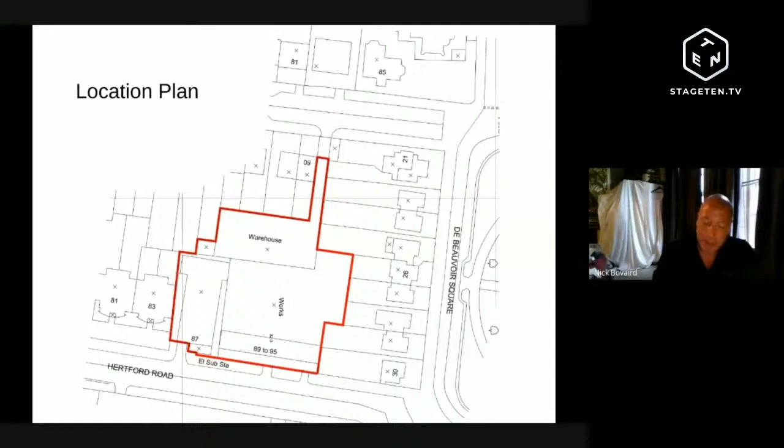The site contains a group of vacant factory and warehouse buildings to the south of de Beauvoir Square and in the de Beauvoir Conservation Area. This is the second time this application for this site has been before committee, having been approved previously in 2010. The approved scheme, though similar in its layout and massing, was inferior in many respects to the current proposal and was decided under UDP policies. The Section 106 for that scheme was never agreed. Subsequently, the scheme was revived with new drawings and further consultation, and this is the scheme before you now.

This is the view towards the site looking north, with de Beauvoir Square to the top of the screen and the site placed directly below. Kingsland Road runs north-south to the right of this picture.

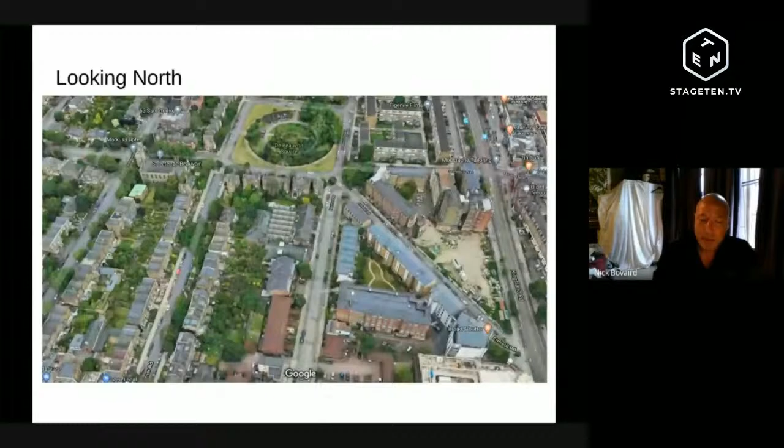The main application, 2009-2842, is for the demolition of the rear buildings, including the Sawtooth Central building. It would retain the L-shaped buildings facing the camera here and fronting Hertford Road. The site is locally listed, but these are the two main heritage elements. A mixed-use development of employment floor space and 6 residential dwellings would be constructed around a central courtyard.

2020-0684 is an associated listed building consent. The site does not contain a listed building, but an existing wall to be demolished appears to have been built above the curtilage-listed garden wall of the listed buildings of de Beauvoir Square to the north.

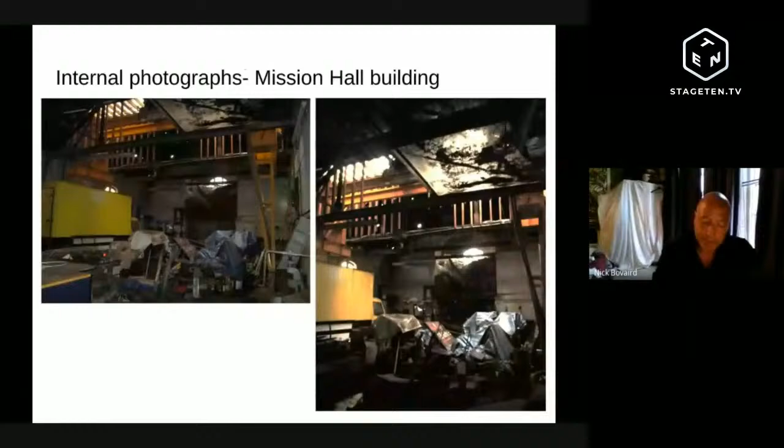These photographs show the inside of the Mission Hall building, with its internal crane and poor levels of light. There's currently only one internal level. The Boris Building is arranged over the 2 levels shown here. It still contains the machinery last used for making bags.

The top picture here shows the rows of shelving within the central sawtooth-roofed building of the site, which is to be demolished. The bottom picture is for the northernmost building, also to be demolished. This building is in particularly poor condition. Neither of these 2 elements are considered to have significant heritage value.

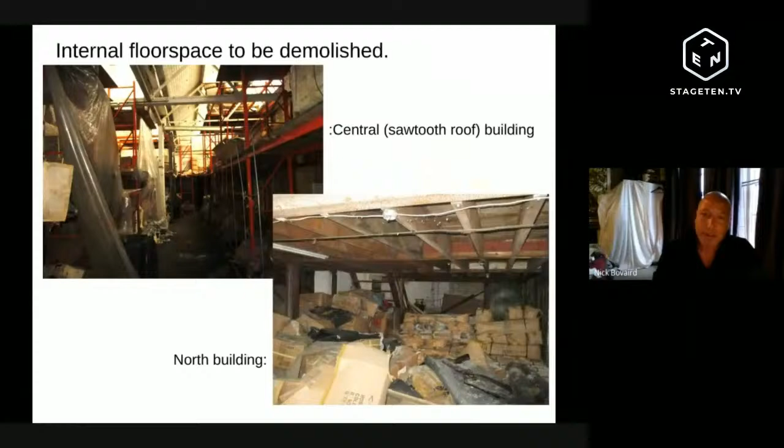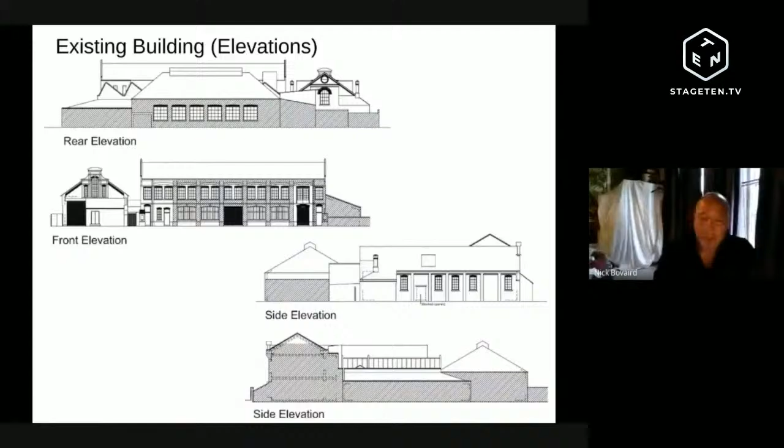The massing of the existing buildings can be seen on these elevations. The existing plans show that the site is generally laid out over ground floor level only, with high ceilings to reflect the use. The Boris Building is the only one with 2 stories at present.

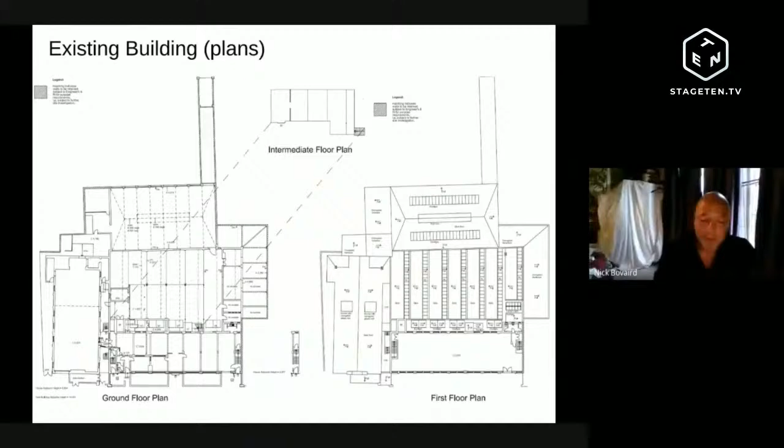The proposed ground floor plan shows the retained buildings to the front, with a passage laid out through the Boris Building to the courtyard in the centre of the development. The separate commercial and residential cycle stores are located within the courtyard, along with 2 areas of soft landscaping.

To the rear of the site, top of the screen here, is a terrace of 6 houses, arranged over 3 floors and with private gardens.

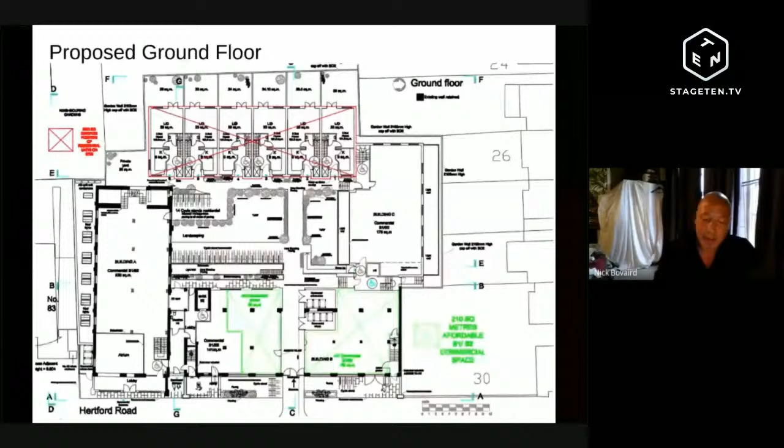As is laid out in the committee report, the proposed standard of accommodation for both commercial and residential occupiers is considered good. The proposed affordable workspace would be in 2 spaces at ground floor level of the Boris Building, seen hatched in green here. This represents 10% of the proposed office floor space and is located well within the site.

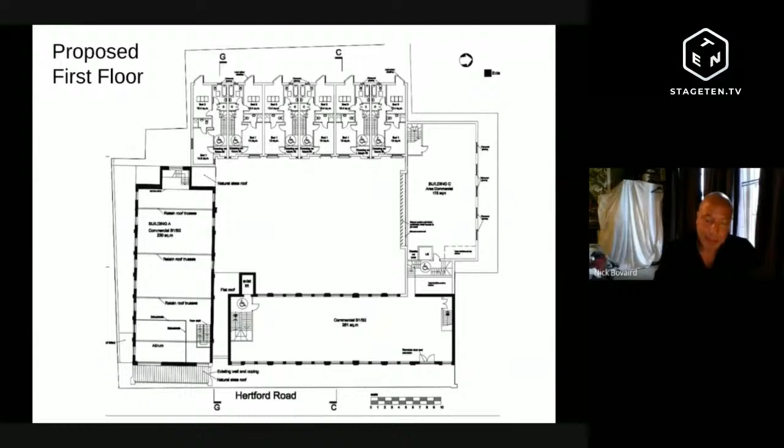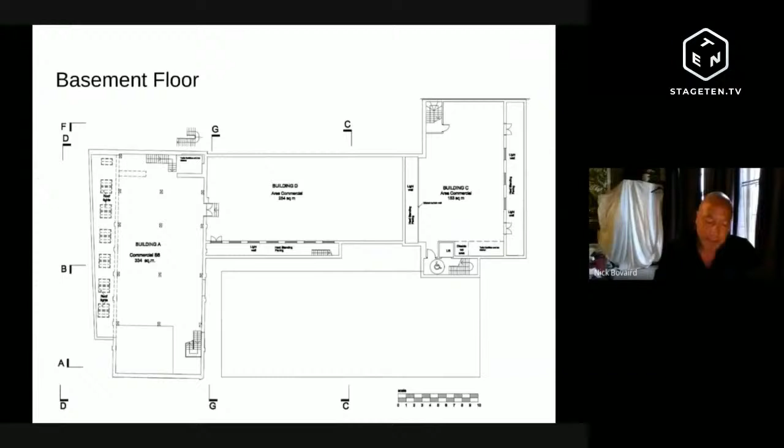In design and conservation terms, the proposal is considered acceptable for this conservation area location. The Boris Building and the Mission Chapel are important locally listed buildings located in a prominent location within the de Beauvoir conservation area. The reuse, repair and reinstatement of lost architectural features on these locally listed buildings for a considerable public benefit will ensure a sustainable long-term future and will result in an enhancement of the overall conservation area.

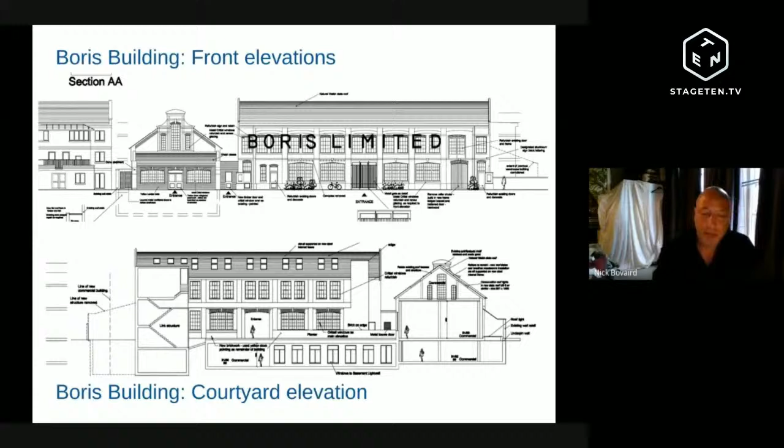The two buildings of significant heritage value are retained, and the courtyard element introduces a good amenity area to the heart of the site.

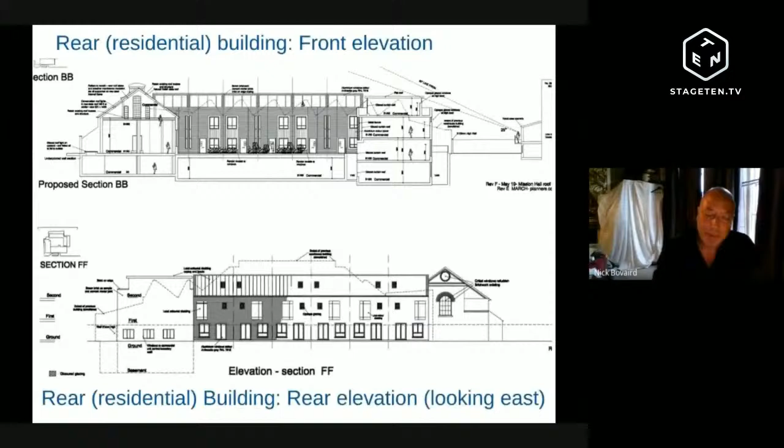The detailed design of the residential building seen here, and here to the left, is not yet fully realised. This is also felt to be the case for the dark brick commercial building to the right. We've recommended conditions to obtain full details of the architectural detailing and materials at the next stage. As such, the design of these buildings can be considered acceptable.

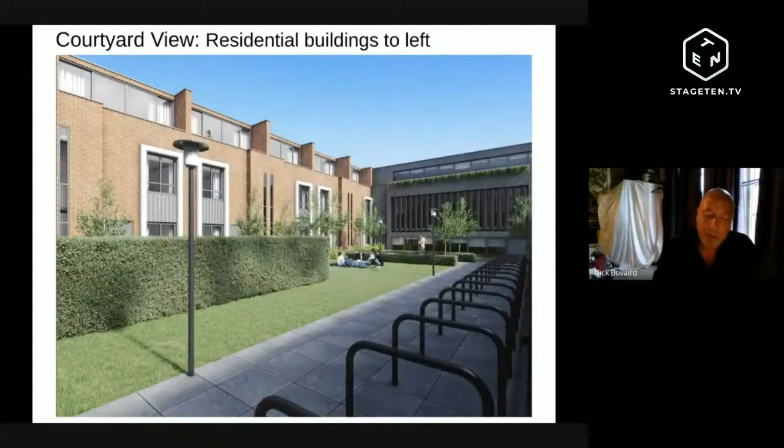The new buildings to the rear, and in particular those bordering de Beauvoir Square, will result in a degree of heritage harm as a result of the changes in massing. However, overall, the public benefits of the scheme, including the reuse and repair of these important non-designated heritage assets, is considered to outweigh this harm.

The massing of the new buildings differs from the buildings currently existing on site, but as laid out in the committee report, setbacks have been used effectively, and it's considered that there would be no significant additional impact on neighbouring occupiers in terms of daylight, sunlight, outlook, or sense of enclosure.

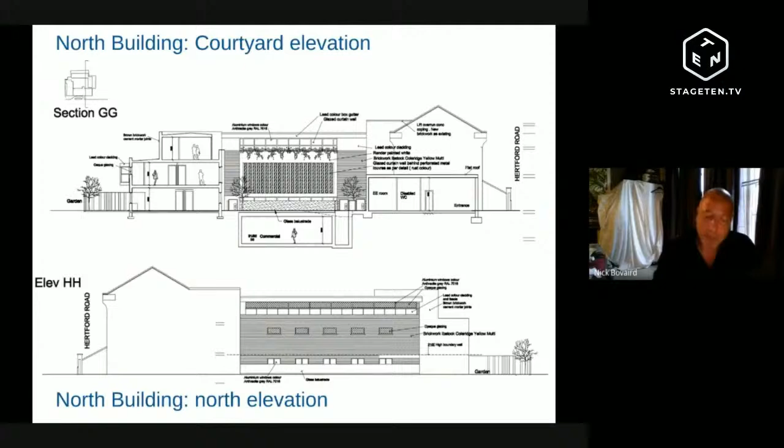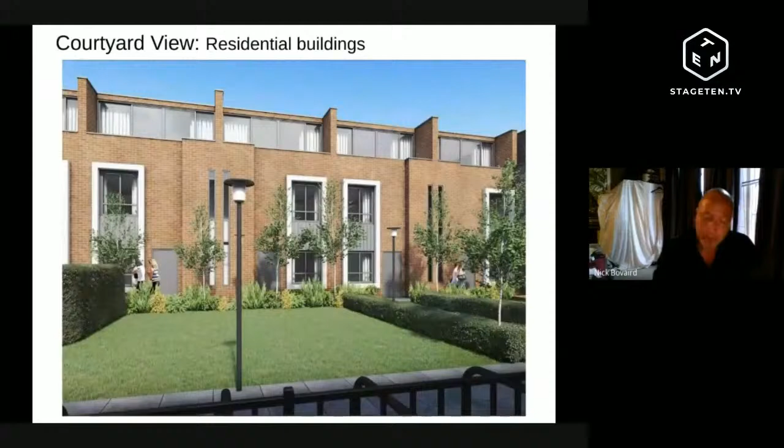Residential objections have referred to the restarting of an industrial use and the noise that commercial operations may bring. While an industrial use would not require planning permission in the existing buildings, the current permission provides an opportunity to soundproof and otherwise control the noise experienced by neighbours. The panel will have noted the detailed conditions in this regard, ensuring that noise is not audible at neighbouring residences.

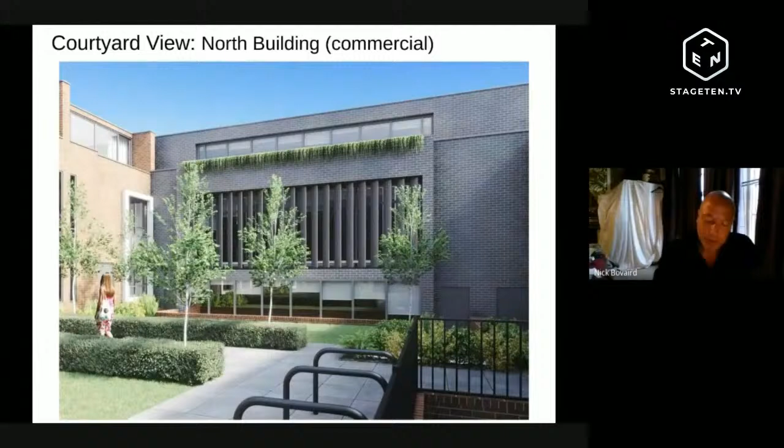In transport terms, the scheme is also considered acceptable, as laid out in the committee report. Along with the separate residential and commercial cycle parking within the courtyard, the proposal would provide a blue badge space and 2 electric vehicle charging points in front of the building.

So to conclude, the proposed application is considered to be policy compliant. It brings the 2 significant buildings on a locally listed site back into repair and productive use, while providing good quality commercial floor space and 6 new houses. In these and in other respects, the scheme is considered acceptable. It's recommended for approval subject to conditions and a legal agreement.

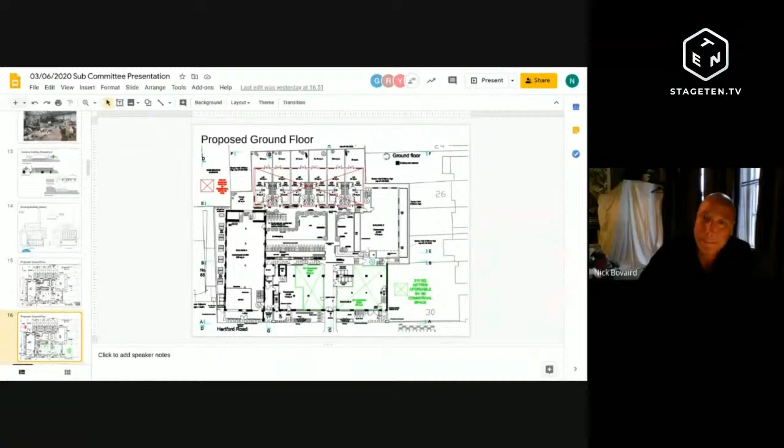Okay, right, and then from there to the footway, the roadway, where the refuse trucks can pick it up. Exactly, yeah. And they'll be wheeled out, I take it. Well, yeah, those will be wheelie bins, I think. Okay, thanks.

Okay, I think we know what we've got now. We're going to move to a vote, doing something our Parliament seems unable to do. I'll call for a vote, we'll all put our hands up, then I'll go round and you'll say for or against, like last time. Does everybody understand? We'll hold our hands up until we've told the legal officer and Gareth which way we're voting.

We've got one condition, that Peters brings back the elevation, perhaps the brick choice, and that the electric vehicle charging details go into recommendation C. So we'll have a little extra time to think about that, though not much, I suspect.

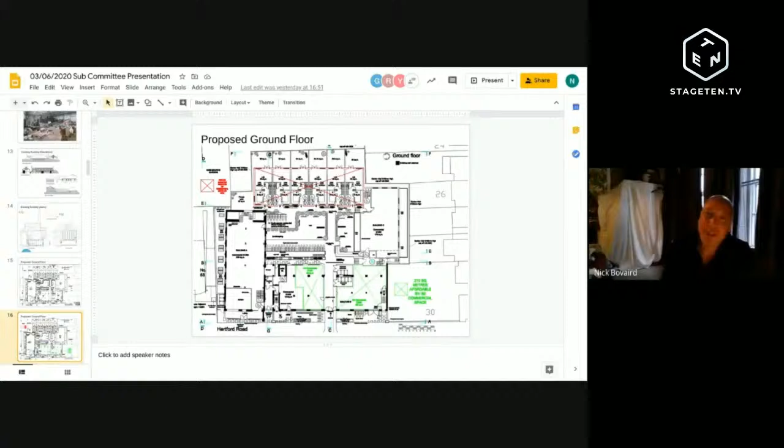So the recommendation is to... Okay, you've got a hand up before that. Councillor Potter, did you want to say something? She's muted, you need to press the button. Yeah, I know, apologies, it takes a while to come up on screen. If it is coming back, can we have more details on the retrofitting measures and how the decision is made in terms of the balance with the listed building, etc.? I'd just like more details on that, please, if it's coming back.

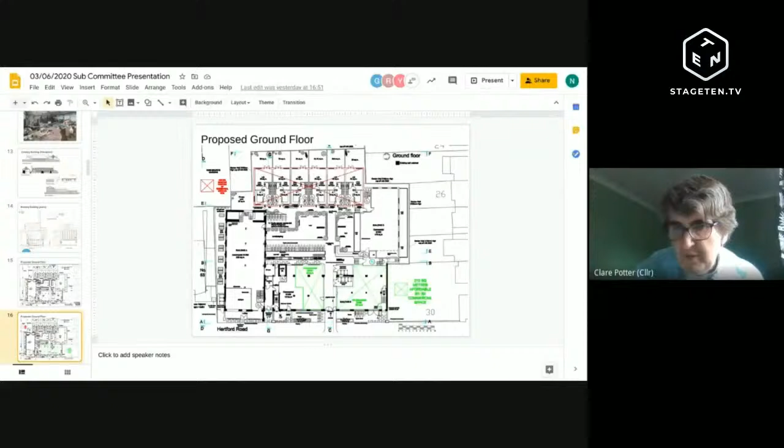Nick, is that a planning issue? I think that's something we agreed would be building control, but I don't think there's any decision for this to come back, is there? The decision that needs to be made is whether the condition comes back later. Is there a condition associated with the materials? Yes, there is. Insulation of the walls? No, there isn't, so that's a building control condition. And we're happy with the sustainability as set out in the sustainability document and reviewed by our sustainability officer.

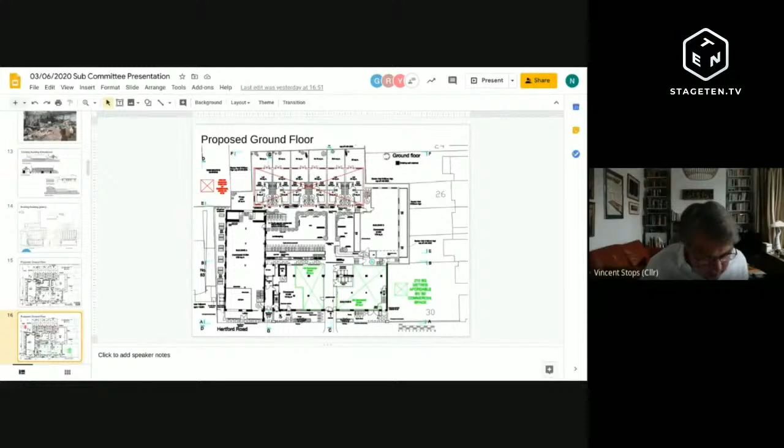Okay, right, so the recommendation is to grant planning permission subject to a 106. Sorry, let me take the presentation down, I forgot to do that. Well, according to this, it is done.

And is there a listed building consent as well? Yes, there is, that's the second recommendation. So where's the second recommendation? It's underneath, at the bottom of recommendation A again, but it's at the bottom of the other one. So you've got to go down to about number 38 before you get to the second recommendation A.

So do we do one at a time, officers, or both at once? Tom, do we do both recommendations? I think we can do both separately. So I'll do the first, the general planning permission. All those in favour, please show.

Right, so I'm in favour. Councillor Hanson? In favour. Councillor Levy? In favour. Bell? In favour. Snell? In favour. Potter? In favour. Race? In favour. And Shuhan? In favour. So that's all of us.

Thank you very much, now the listed building consent. I think that's to do with the wall, actually, isn't it? That's right. So all those in favour, please show. Stops is in favour, Hanson? In favour. Levy? In favour. Bell? In favour. Snell? In favour. Potter? In favour. Race? In favour. And Shohan? In favour. Okay, thank you. That's unanimous as well. Did you get all those, Gareth? I can confirm I've got down all those votes.

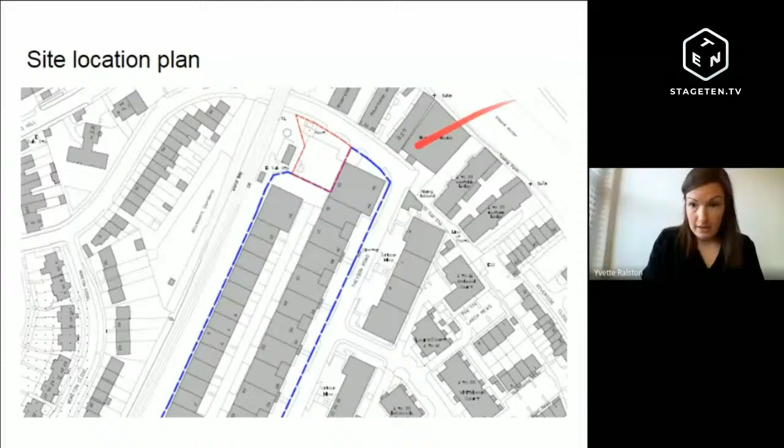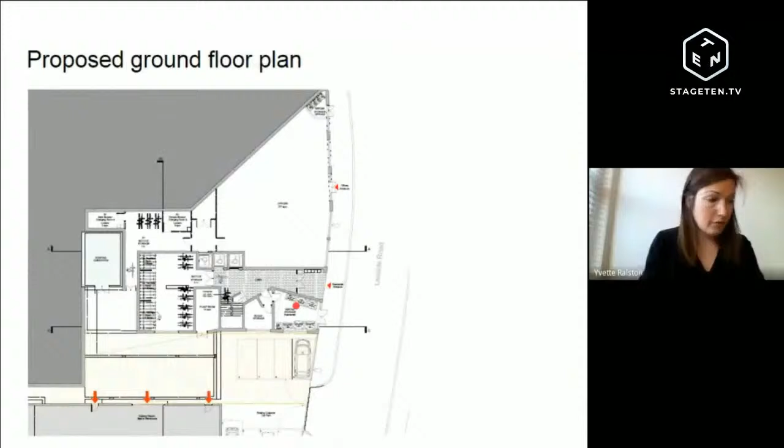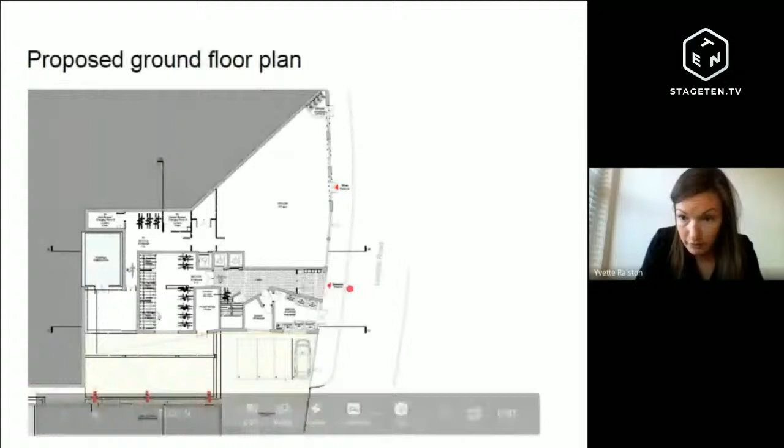So the plans - the proposal is for the construction of a 7-story building for 22 residential units with commercial space on the ground, first, and part second floor. This is the ground floor plan, with office space on the ground floor, and the main residential entrance also here on the ground floor from Leaside Road. First floor plan has more workspace.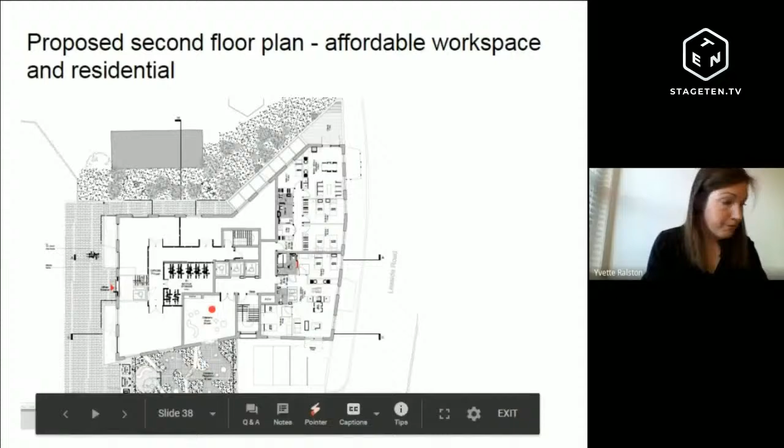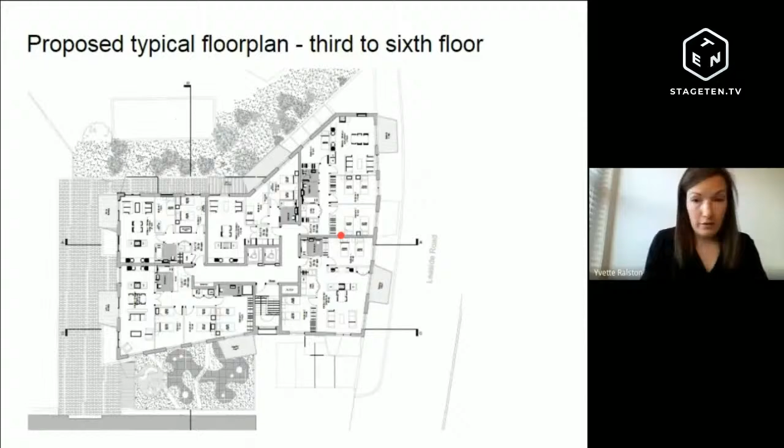Typical floor plans for the 3rd to 6th floor show 5 flats per floor. The units are aimed at the local Jewish community, so they've got features like dual kitchens and bigger balconies that offer unobstructed views of the sky. In total there are 7 3-bed units, so that's a third family sized, 14 2-beds, and just 1 1-bed, which is an acceptable mix. The quality of the accommodation is acceptable too.

This is the green roof on the top floor, accessible in the middle with more extensive green roof around the edge. There's also access to the river towpath on the other side of Leaside Road through one of the developments on the other side of the road, so residents do have adequate access to amenity space.

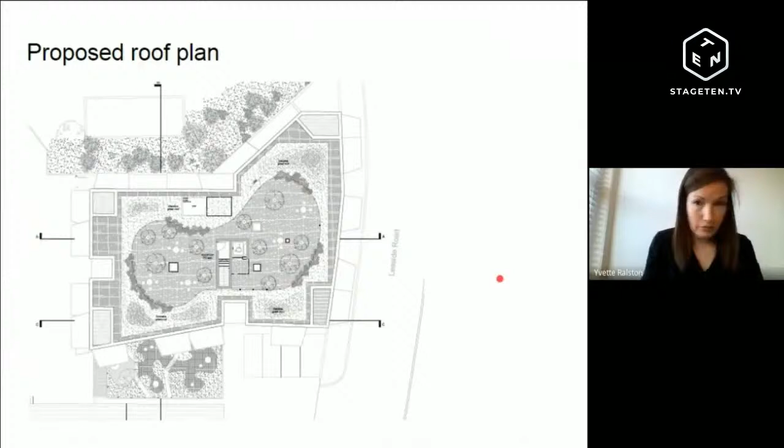Overall, the scale, massing and architectural detail of the scheme is considered to be acceptable and appropriate to its context. There are modest daylight and sunlight impacts on properties opposite, but overall amenity impacts are acceptable.

I have to point out that there is no affordable housing proposed as part of this scheme. There was a viability assessment which was assessed, and any surplus identified was put towards improving the affordable workspace offer. The outcome we've got is a proposal for 100% affordable workspace at 60% of market rent, which is considered to be a good outcome in this PIA location.

And the scheme is recommended for approval.

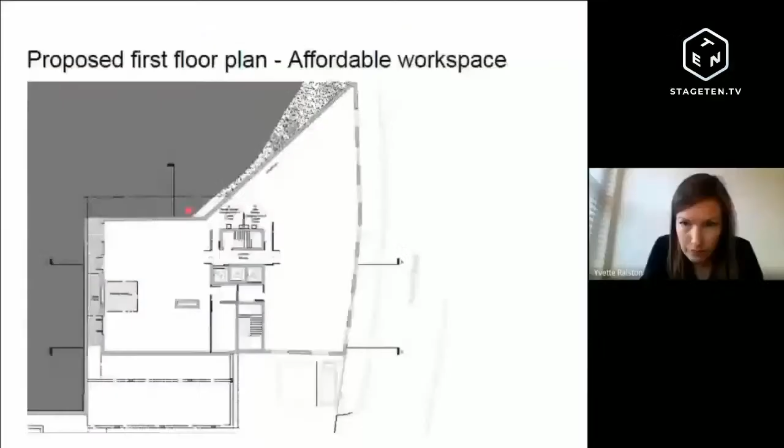Architect, can you help us? Do those doors open out onto the pavement like they look on the drawings? I'm afraid I've been having technical problems throughout this whole thing, and some councillors keep getting cut out. We will look at that. I think the idea was that it was just for when the bins were being removed, but that's something we can clearly make improvements on in the next stage of the development of the scheme.

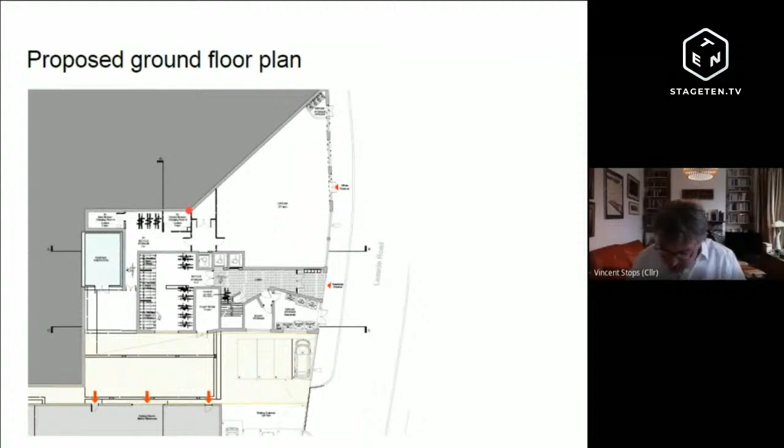Okay, thank you. The second point, this adjacent building, this is to Israel. Israel, you've got a load of sheds that front onto the railway there. I think people are living in them. Did they have planning permission to be living in them? What's the status of that accommodation there?

Israel, can you unmute yourself? Oh, thank you. Can you hear me? I can. So some of those units are long leasehold units where separate leaseholders control the uses of those units. Some of those units have got planning permission, particularly the ones under the freeholders' control, which have planning permission for residential use. By default or a specific planning permission? No specific planning permission. One of the planning permissions was done under permitted development from office use to residential.

Okay. John, are you around? John, sorry? Chair, yes, he is. Hi, Chair. Evening. Hello. Do you know about those?

We do, Chair. We're very aware of the residential uses in the industrial premises, and the enforcement team have investigated and taken action where known. This wasn't helped when the government revised the PD rights to allow changes subject to prior approval, which the applicant mentioned. This resulted in both the loss of such vital uses as well as units which don't meet size and layout standards, which we were unable to prevent. In response, we placed an Article 4 direction restricting such changes of use, but until that happened, a couple of prior approvals were obtained simply because we were unable to refuse them on those grounds. Despite that, the enforcement team have been very active, and we've successfully served notices and won on appeals.